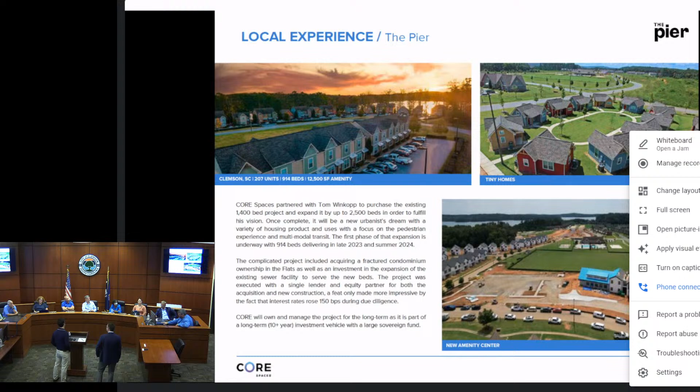I'll kick it to Andy for this next intro. Thank you, sir. And thank you all for making special time for us today. I might call on Joe if you guys ask me a tough question, and Chirag Patel is our architect. He's also in the crowd, so I may bring him up if you have a technical question.

We were here in May talking about this project, and since then we've made some progress on the assemblage of land that we actually control in this area. As we've been making progress on that, we've been working on a scheme and a proposal with the goal of accomplishing as much as we can within the Uptown Next framework. So we thought it might make sense to go through that as a recap, to go over what we saw in the framework and what we were going for as we developed this.

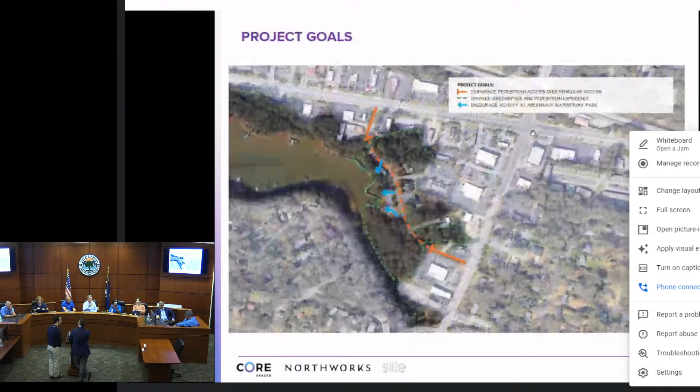Well, the reason I'm asking is because if that's what you have at the beginning of the presentation, I guess that's what I'd be looking for throughout the presentation. Because when you started, you mentioned student housing units and non-student at the beginning. So by being early at the beginning, I'm just trying to figure out the point there.

The Uptown Next plan contemplated student housing within the superblock — this is not your plan, this is our plan, the towers. Okay, just making sure I understand. Right, and then all the non-student housing was on the other side of the street. That's what we noticed, yeah, I think in the current plan. The purpose of this slide is just really to show all the ways that we're helping with our plan, and I think we're really executing on what the spirit of the Uptown plan was.

Okay, asterisk. Will you go back? Sure.

There is going to be, it's not marketed as student housing, but there will be students living on both sides of the street everywhere in this town. That's going to happen. I would love if there was a way, and I know we're never going to say students can't live somewhere, that would defeat the purpose of living in a college town. But those townhomes, maybe not renting by the bedroom, but renting by the townhome or renting by the flat. There is a demand in this city for housing that is rental for people that are not students, young families, professors coming in for 2 or 3 years, people who don't want to buy a home and don't want to be responsible for maintenance. Outside of the workplace, housing conversation would be very beneficial, and obviously workplace housing would be beneficial as well. That, I think, would be a huge get if you guys could figure out a way to factor that in.

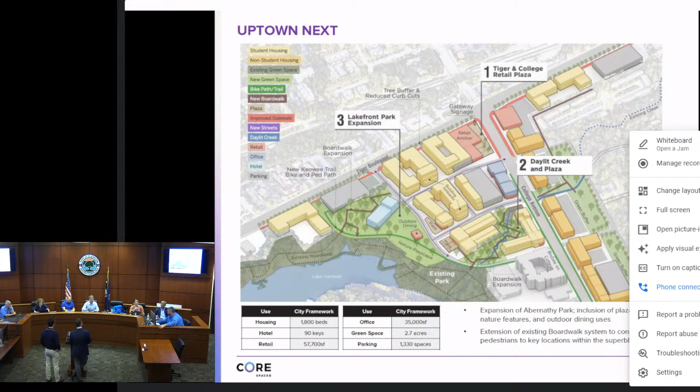That's where you're gonna have a lot of success if you can market a unit to be rented versus a bedroom. A mix of both would be great, and I really don't think you're gonna be missing out. You're not gonna need to separate it - a townhouse is perfect for that.

Technically, that would be going to that deck. And then visitors would be going down Keowee Trail to the roundabout into the public parking.

Do you really have to leave that road open between those two roundabouts? That's an interesting question. Close it—the answer is no.

My fear is because it's a noted cut through anyway, and it's used—someone can do a traffic count, but it's a noted cut through now. I'm just afraid that if you keep that road open in any form or fashion, you're still going to have that cut through traffic. It's not going to be safe for the park and for people walking around. That is where we started.

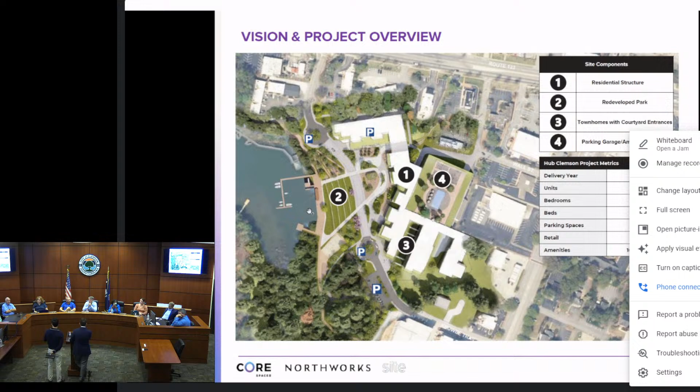Well, to my opinion, this is the best plan we've seen so far for the lakefront usage, but we had talked about an amphitheater all along. Right, and this gives us that, even though I know about the music restriction.

So skipping to that, we were thinking about how to take this terrace lawn and really program it so it can be cool. So you can see this image in the top left, that's just a typical day.

But in the bottom left, we do have this stage element right there in front of the lake. That could be open mic night or some kind of musical performance, or it could be a movies-in-the-park type situation.

And then we were also thinking about this kind of newspaper stand—can you program that with farmers market stalls and really open that up to the public to make this a community gathering space?

So it's been really fun to think about, and I think everyone on our team has really enjoyed this process, just thinking about how this space could be used. It's very unique.

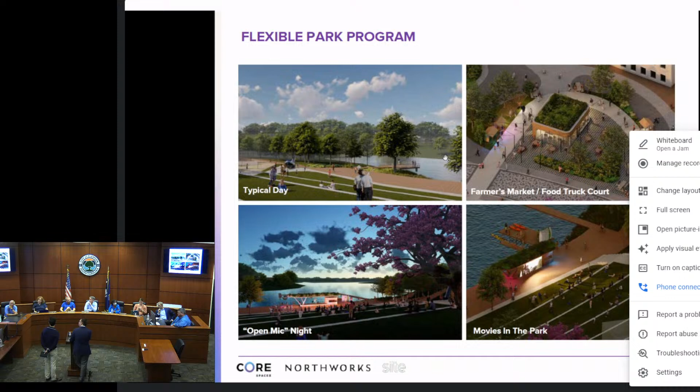I mean, if anybody wants to see what that looks like, go to Knoxville. They've got something very similar to that, downtown. Yeah, they have a great downtown.

Right, and so this is just a view of the other side of the park. So you can see here's that kind of stage element, this is the newspaper stand up here, this would be kind of the main entrance to our residential component to the project, and then we have sports courts down here, and an additional playground.

We're also showing a space for perhaps a canoe rental down here. I think that was something that was specifically shown in the framework plan.

And so these are some inspirational images that we were thinking about while we planned this out, and those play areas being kind of interactive and playful in a way.

Also, this is a Woonerf that exists in Batavia, Illinois. Can you pronounce that one more time? Woonerf. W-O-O-N-E-R-F. Woonerf. One of the shorter Dutch words. Never heard that word before. Yeah, write that down.

Andy's writing it down. I think the upper left is actually, if anyone's been to Unity Park in Greenville, that gives you a good idea for how well what we're kind of thinking about can be done. And I think the upper right and upper left kind of play with this idea.

When we were approaching it, the idea of the built environment as art, right? So you saw that brickwork as in the underpass, as trees. Some of the best inventions come from constraints - we couldn't do vines underneath there like we wanted to, so we thought about that.

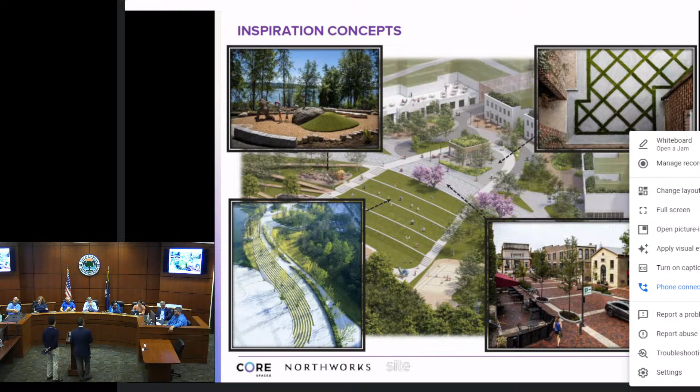Just again, to build on that same concept, we have the tree kind of expressed in this brick pattern here. It's just a general inspiration image for how the retail might start to look, and it's just inspiration at this point.

I'll get to the public benefits. So the result of this, we've identified at least 5 public benefits. We started with a dozen at one point. We whittled it down.

So we'll be expanding the park - that's pretty obvious. We will be providing some retail at a reduced rate, because we like to take ownership of the placemaking that goes on in our projects, and we think that's a necessary component to keep this space active and vibrant. We've created connectivity as shown in the Uptown Next plan. We've positively impacted the traffic and parking situation versus what currently exists. And then we're creating probably a lot of new tax revenue through property taxes.

So we can go through each one of these. You want to take this? Yeah, sure. So I think for the purposes of just showing something of scale that is comparable, we chose Madison, Wisconsin, just because we know it really well. It's in our backyard - we've developed 3 buildings there.

Not to say that Abernathy Park should become Memorial Union Terrace, but I think that after the expansion, as we have kind of designed our building, and if you think about the C-shaped courtyard as an expansion of the park, the size of the park would be bigger than the Memorial Union Terrace at University of Wisconsin-Madison, which is on university campus.

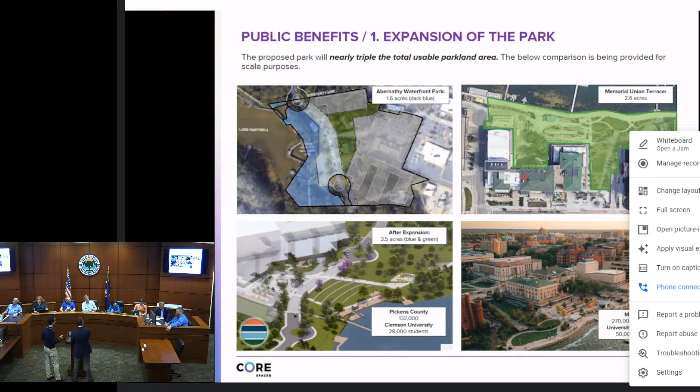And then for the next one, Memorial Park at Madison, do you know, was that done in stages, kind of what we're trying to consider? It's a great question, I don't know the answer, but I'd love to find out. Because it's dead center for everybody. I was thinking about it architecturally, trying to think if they did it as a city plan or not. We have some connections, I'd love to ask people in the real estate department there.

For the number 2 benefit, in terms of jump starting this park with vibrant retail and programming, we've approached someone we're actually doing business with right now, who's in the audience, who I'd like to have come up for a moment and say a few words.

Tyler Baccino is a young local entrepreneur who we think has done an excellent job creating something out of nothing. For a restaurant of this size, this was a 50-year-old credit union building with limited parking and a gravel side yard, located right next to train tracks, off the main road. There's only 1,000 kids nearby, and that's not enough demand to justify this business being successful. So in order for it to succeed, you have to program it. I think this photo speaks more than I could ever say, but I'll bring Tyler up to say a little more and introduce himself.

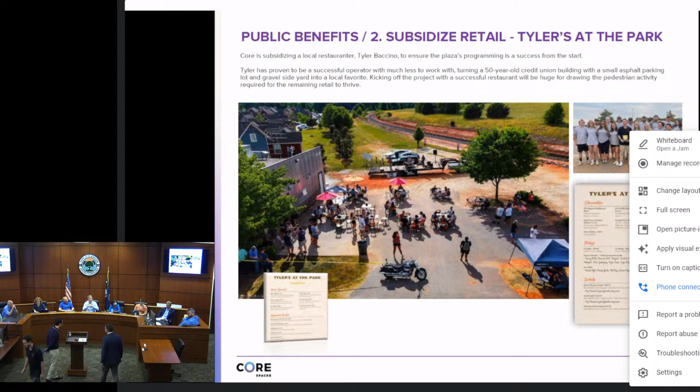All right, moving forward, more public benefits. So the enhanced connectivity, which we already hit on, we've superimposed our plan onto the Uptown Next plan just to show how closely we're adhering to the initial thought of where the connective boardwalks would be, connecting to the larger super block.

But could you go back on this one? So if I'm coming to the park in a vehicle, then really the only way in is going to be to come up to the top there and pull into that parking lot. You could actually pull in either way.

There's covered parking here that would serve the retail, but it would also be open to the public. There's also a parking lot here with about the same number of spaces that currently exist in the middle, we just moved that down. The primary parking closest to Potbelly Deli is for the townhomes. Is that what that was for? That's for all residents. So then another one is the public piece.

And my other question, and I know this is just your first stab at this, but your woonerf idea, I'd love to see some of that done along College Avenue, because leaving it a 4-lane open as it is isn't going to slow anything down, that's sort of the concern. We've talked about turning it pedestrian and other things. It would be nice to have some ideas as we do that. I'm not asking for the impossible, but you've got to figure out how to get people in and out of there.

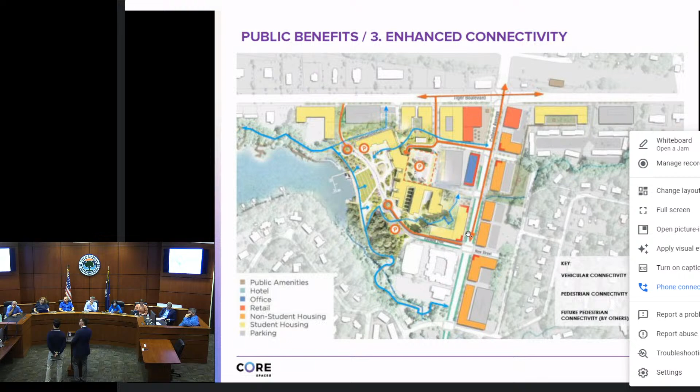I think one of the next slides might help answer one of your questions. This is the parking and traffic impact of our project. We're showing 34 spaces for retail plus 20 spaces for public, which would be surface parking spots, so about 54 spaces total. I think what was there, 19 that exist right now? So we are increasing the amount of public parking available from either side of Kiwi. And then there's 650 spaces in that deck, which would be for residents.

One of the things we noticed was that all of the goals published in the Uptown Next plan, we met. Our site would result in fewer curb cuts than currently exist, broader sidewalks, fewer vehicle turning movements on Tiger. We would remove the eyesore properties currently along Keowee Trail. We'd have parking garages that support business, anchor retail, and students in housing that generate fewer overall trips per day. So we feel our plan accomplishes all of those, and we wanted to point that out since we didn't realize it until later.

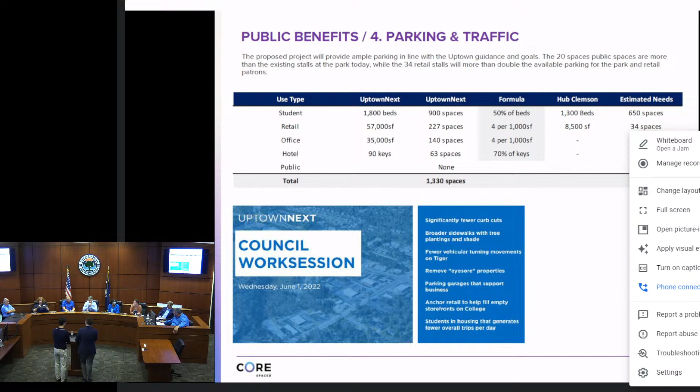I guess the last public benefit is just the money - the increased tax base, which is going to undoubtedly be large. We listed out all of the areas, so it's not just Clemson City that gets increment. Student housing, ironically, doesn't put a big burden on the local school districts - that's important. But most importantly, the park can serve as a catalyst for uptown development - the development of this world-class park, this regional attraction. We'd be naive to say this isn't an important part to talk about.

Have we made them aware of the new impact fees yet? I think we're painfully aware. Good response. She sent it over 2 nights ago. No, I'm just joking - 2 weeks.

Okay, so questions and feedback. Have you envisioned an order for construction? What comes first, what comes second, how does this go? Do you deliver the whole project?

It would likely be one delivery, probably a 30-month construction schedule - if I were guessing, it could be slightly less than that. It would probably be wood over a concrete base. The retail would all be within a concrete base, and then the residential would be in wood above that, and the parking structure would be precast.

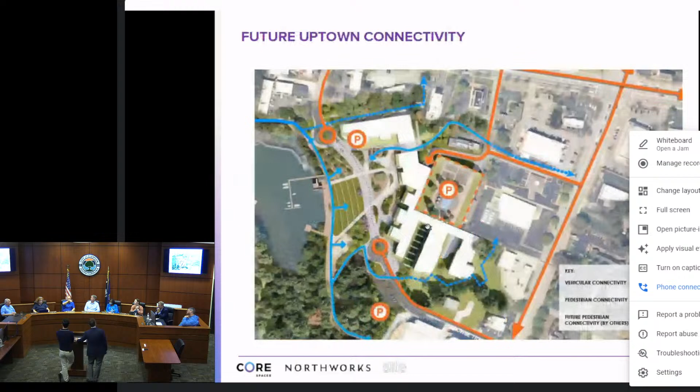So that north end traffic circle, that's making a left in there. You can't make a left, it's right in, right out. And if that's the only access to that public parking, that's not workable, whether it's 54 spaces or 1,000 spaces for the public there. That's going to be a really, really hard thing to happen.

So if you go down Wall Street right there, there's a way to connect it into Wall Street. Just connect into Wall Street, you already show it kind of coming in. Or, come over there - now this is a redesign for you - or if some of that public parking deck happens on the south end, and maybe some of the townhouse units that then have a little better view of the lake, as some people have said, end up on that north side where you have a parking deck.

I don't know, but again, it's going to be really public parking on that north end, unless there's another access that, again, making a left-hand turn into that, going west - almost impossible, really bad. Making a left-hand turn out of there, totally impossible.

So I think how that public parking, where it is and how you access it, is really, really important. That's a good comment. Access off College is going to be your most practical way to make that occur. Yeah, I mean, on just Wall Street, as you kind of got it drawn out, it seems to me you could make it work on that direction.

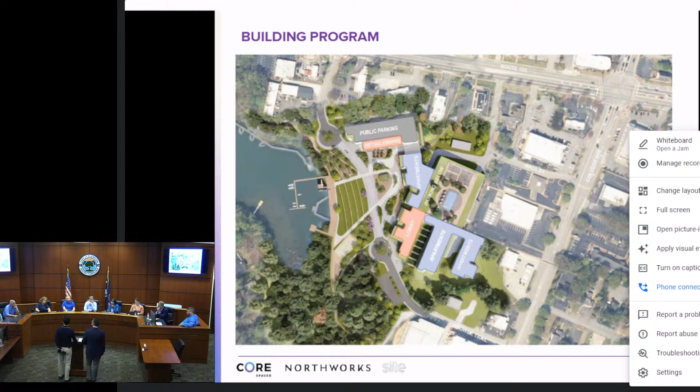I think we have a volleyball court shown, but I think that's more just a concept. We would have to work with you guys on that. And ultimately, we're going to design the park the way that we want to design it.

We will appreciate ideas and concepts, and I think y'all have got some great concepts here, but ultimately, that's our call. Site Design Group was our landscape architect on this, and they are nationally renowned. They do a great job. They did the renovation of the pier, and some really high-profile projects in Chicago, like the Chicago Tribune Tower and the Michigan Avenue expansion. But we're going to work with them on the private side of the land, and we would highly encourage at least an intro.

Other questions, comments? I think there's been a lot of good feedback. Robert and I probably had a little more information, that's why you're hearing us a little quieter. Several months ago council asked us to kind of vet the different groups with staff, so we worked with the guys. What I will say, with the great comments tonight, they've been responsive to every piece of feedback we have. So I'm looking forward to the next step now that you've gotten a little more robust engagement.

I'll just add to that. The changes you've already made from the initial proposal, we do appreciate that. Looks good. So we greatly appreciate it. You've always been agreeable to work with us.

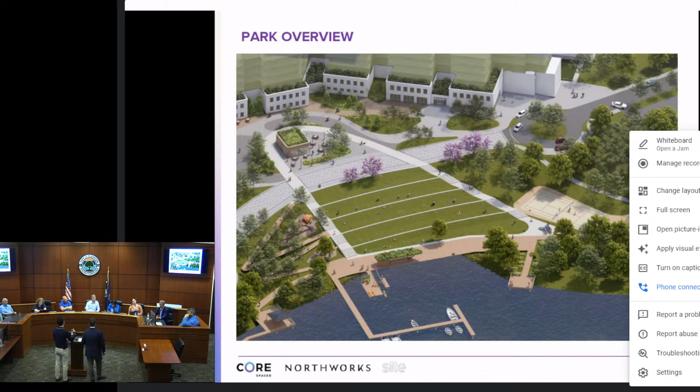That's what I was thinking, that green, specifically the retail you're seeing right now. So our primary focus was the pedestrian experience, and that step back at the first and second level is imperative for honoring that. So it's 5 stories of housing over the 2 that you see there, for a total of 7. And when you're in the courtyard dining at Tyler's at the park, if you're looking for it, you're going to see the residential building. But the idea is that you're really experiencing the 2 stories, and you're putting the money into the design of those 2 stories - a lot of glass, a lot of really good brickwork.

Mature landscape - I think about downtown Greenville. A lot of times when you're walking down downtown Greenville, you don't realize you're walking underneath a 10 or 12-story building, based on the landscape and the on-the-ground experience and those kind of things. Now, it'll take a little while to get there, but with good design, you can mitigate some of that.

I would suggest that parking stories are much different than residential stories - because of height, it's much more condensed. So 7 stories for the residential component. Okay, I just didn't think of that until now because your renderings are so beautifully faded out on the top level.

That makes me pause, but that's okay. I think the photo on the screen is probably one of the better ones to provide you that massing shot. I mean, that will be the biggest structure on the lake, right? So that's what I'm thinking - that is towering. I don't hate everything you've given us, you've gotten my feedback. I just think that is huge.